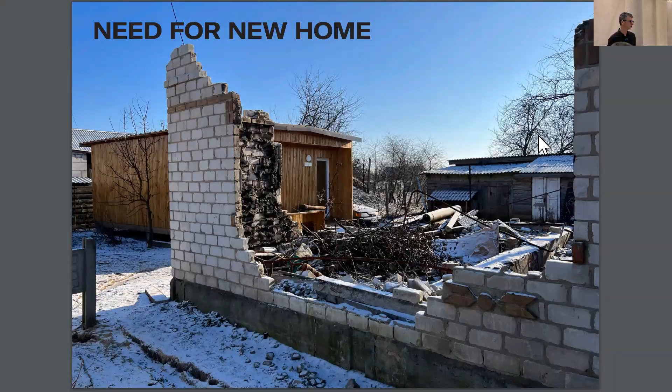When I joined the cluster, we realized that this was a really great initiative, a nice solution. But as a professional, there were some challenges to tackle. The first challenge was the one of upscaling, to speed up the process of the reconstruction.

The reconstruction and offering of new homes cannot be based on single units. There is also the question of future-proof design solutions, because we know that we are answering emergency needs now, but this emergency solution will have to stay over time, and it might become permanent or half permanent. So it has to be a very good solution because it needs to stay for a while.

And then we also have to ensure, besides the new dwelling, urban quality. From the moment that you upscale, there is also the question of how this will fit into the urban fabric, and how this will also create new hope and a new way of living together.

The idea through the cluster is that this is not something that is a single project, but rather an initiative that is open source. That means what we develop through the tools, but also material we produce, would be available for locals, for our colleagues, professionals, architects, but also constructors, to scale up and make our work available for others, so we can work together, and it's not just a single initiative.

So working on the upscaling and open source, we work in parallel on units, but also on tools, like a toolbox that would be available on the platform, on the website. This is a Rhino script based on a unit dimension, how you could assemble them to create multiple or multi-story housing for collective living.

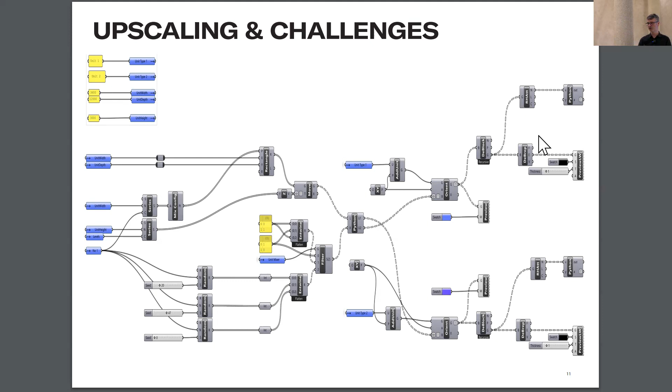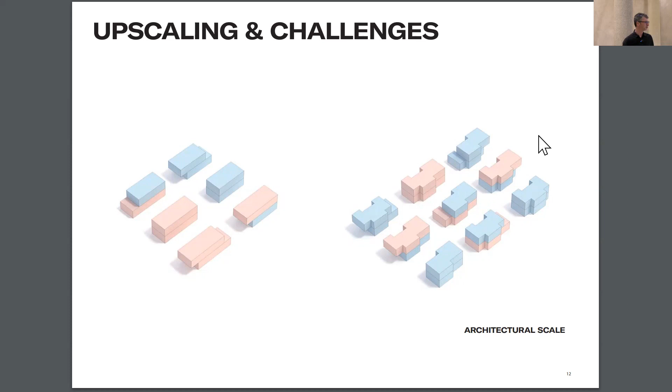And this is also working in an urban setting, somehow with parameters: amount of units, amount of floors, lengths, widths, also dimension of the plot, so that you could already generate some forms. So there are forms that can be single volumes, simple blocks, but also create some urban ensemble made of different sizes of blocks, of units.

That is also including some collective space or collective purpose. The one in yellow, for example, shows how you could integrate a school or daycare or even medical facility, shared space within the development, so that it's not only a housing solution. I think the work is trying to have a wide scope on what is needed with the reconstruction.

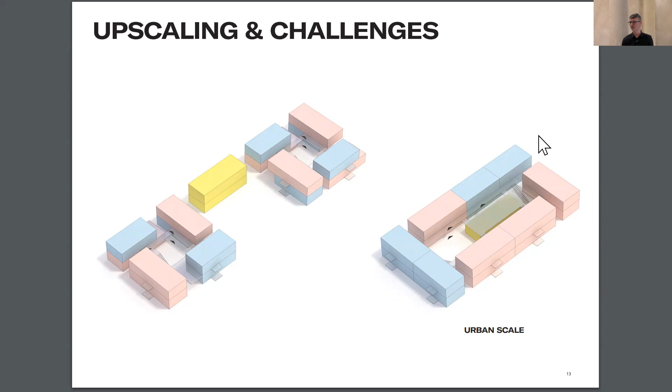To be able to do that, we worked together with FERA in Ukraine, and they have a factory in Dubno, in the west of Ukraine, where they already have a production hall. This is where they produce all the single units. Based on this production tool, we could dimension the size of our units and the elements. The idea is to work with prefab modular wooden elements.

And this modularity is very important for the success of the project, because on-site work will not be possible in the context of war and destruction. So we have to rely on a production that is far away from the front line, that can be a bit further.

The modules are manufactured in the factory, and then shipped on site and mounted with cranes, in a lightweight construction that requires limited support and construction equipment on site with a light crane.

The idea is that based on one module, we are able to offer the full spectrum of housing, meaning single, double, triple units. And this is allowed by the way we would assemble the module.

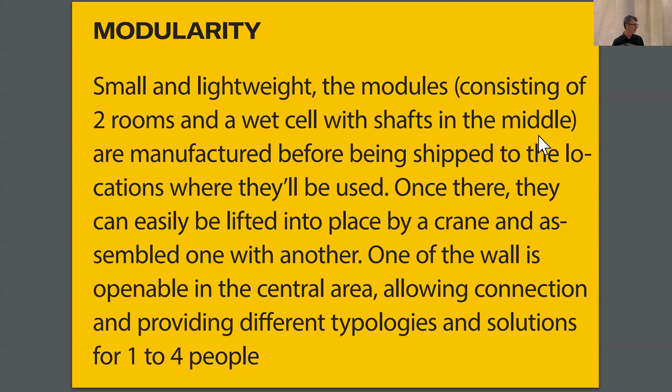For that, we have a test module. So we developed the base, which is a single unit. This is also what is presented in the plans. The single unit is actually made out of two elements that would be mounted on site.

The reason why we split it in two is the capacity of the crane in the factory, but also the capacity of the crane to carry the elements on site. So basically it's all made and meant with a very lightweight construction.

Once the two modules are assembled, each of the units has a living area with kitchen, a wet cell for bathroom and toilets, and behind it also has a sleeping room. And it's possible to open the wall in the middle here.

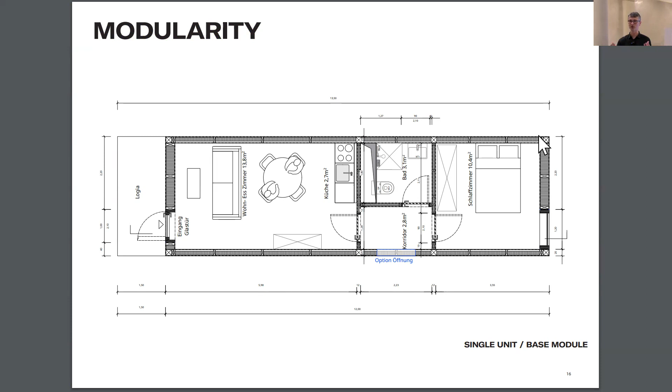Thanks to this opening that is preset in the module, it's possible to assemble and combine modules together and create bigger typologies. The bigger typologies, it's either the 2 room units.

That means you open the wall in between, and then you can have 2 bedrooms. This is for a family with, let's say, 2 children and 2 parents. They still have the same living space and a kitchen at the entrance.

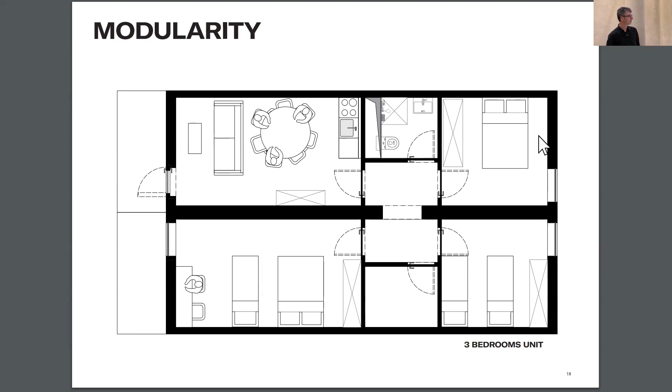And then you can even make a 3 bedroom unit, or like a collective living, like a WG. So this is with 1 more unit, and it creates a bigger room. So the modularity is a bit of, it's as much as we want, and then we can combine the modules the way we like.

And in a section, it's possible to stack them. At the moment, it's a challenge because in Ukraine, it's not allowed to make multi-story housing out of wood. So through this work we want to push that. We think wood is a good solution.

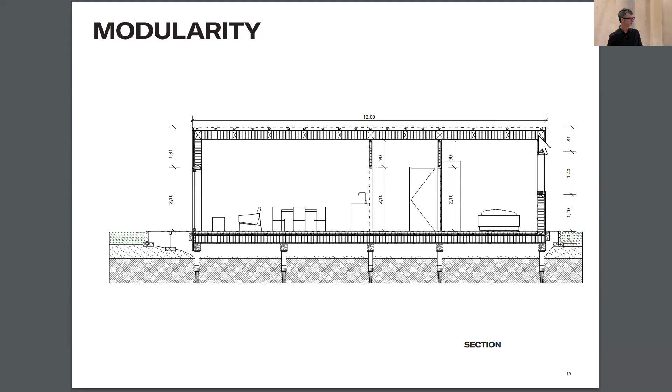So far we use the Swiss norms to plan the project or the proposal. This means that we work with external access, with a gallery system to access the module.

So what we want to initiate through this is thinking about the production tool, going from the single unit to the multi-story housing. It would go towards a pilot project to test all the challenges of this concept.

And together with the authorities, for instance the authorities of the City of Vinnytsia, we are looking for a site, for a location, for collective modular housing for internally displaced people.

This would be about 20 to 30 units. We think it's the right size for a first attempt. And that would mean that it would be a home for 40 to 50 people.

Besides the housing itself, we want to test the collective space, a shared space where people will gather. Also create a courtyard, a space outside where people will also meet and start to have a collective life.

And it's important for us through this pilot project to test all the technical limits of the single units that we have now. So that means the stacking. First to really test the stacking of the modules themselves in terms of engineering, but also in terms of regulation.

We know that through the process of the project, this would still be based on donation. We would be able to make it happen, but somehow that's a way to force the norms and the law to progress and move towards a multi-story housing building. So there is here on the screen an image of what this could become.

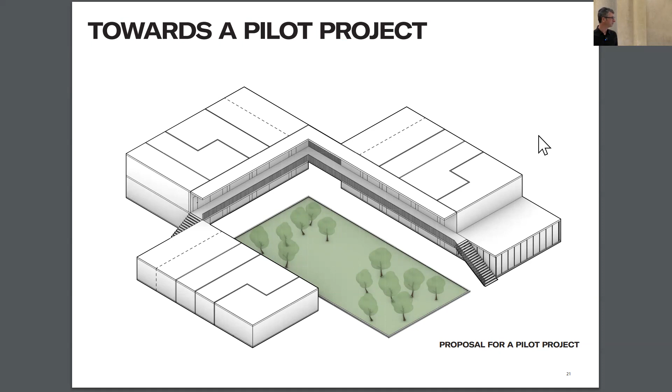While we worked in 3D, we also have a typical floor plan showing all those units. Again we can see how the elements are assembled with the double units, the L shape. This is very flexible, and this is where the script I was showing at the beginning will help us design.

Depending on the needs, depending on who needs a new home, through the parameters we will say we need that amount of single units, double, triple, and it will generate forms. Then it's for us to manipulate the cursor, the parameters, to find the right solution for the right plot, because it will have to match the plot given or offered by the authorities.

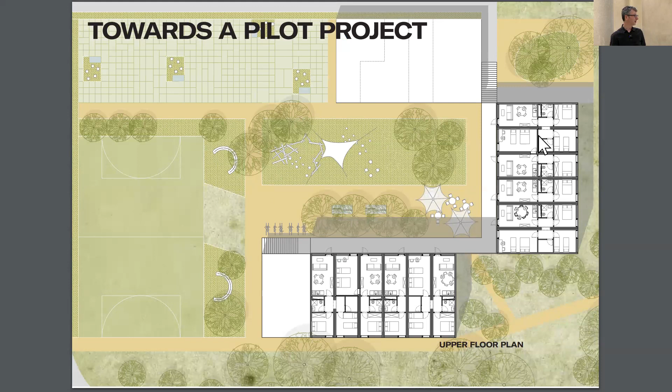This is the upper floor plan. We also have the other floor plans if needed.

I think it's also important to give images of the spirit of what we want to reach. This is an example of the office on collective living, with access from the outside gallery system, wooden construction, with a space to meet. Here we see the gallery is a bit distant from the facade to offer certain privacy.

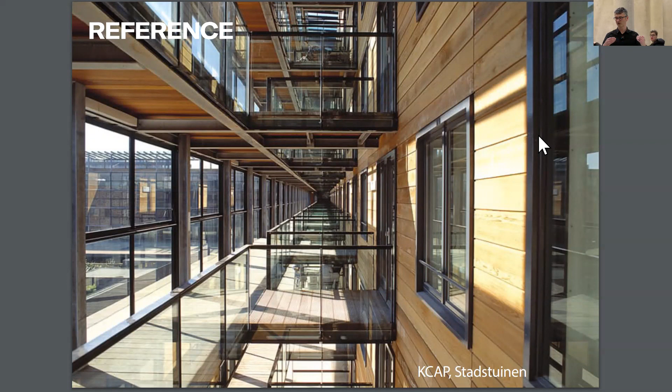In Ukraine there's also the question of climate. In winter it's really cold, so we need to protect from snow. That would be a gallery protected from the roof, but eventually also, or preferably, from the side, like a winter garden—to create this intermediate space. So this is a reference.

Our focus as an architect is also to look for a qualitative solution. Through the prototype, we test different types of facades, different finishes—not one definitive element that repeats all the time, but testing all the variations possible through the factory, since this is really a pilot project. It will be a bit mixed up, but this way we'll be able to test what works, what doesn't, and also test different aesthetics, because the solution needs to answer the emergency, but it also needs a certain beauty, because people need this too.

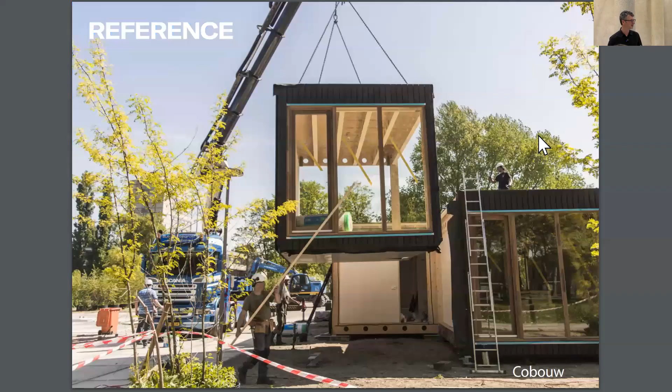I think it's important as an architect to design things that look good, where people will feel comfortable and won't feel in this kind of in-between situation—that they will really feel home.

This is another example realized by Dutch constructor Cobouw. Again, the idea of open source is, at the moment, within the Swiss network with Ukraine—we work with Swiss partners, with Divario, with Ferran Ukraine. But of course the work we do will be open to others, to other initiatives elsewhere in Europe. This is an example of other partners we could have.

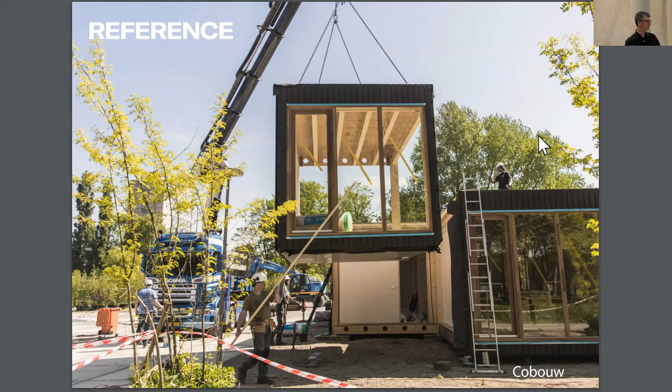It's a very similar constructive system to ours, in the modularity and the way you can combine and make typology evolve, from a single dwelling to a collective living in a vertical way, or a prefab wooden housing. So that's more of an inspiration.

I think the point today for us is to have more initiative together, to motivate people to get on board through the association Ferran Ukraine. Then they could build now up to 80 units.

So our next step would be to confirm the site in Ukraine, and then start a crowdfunding or funding in general to be able to have this prototype and prove that it's possible to go a step further into the upscaling of collective housing, multi-story, and also test the different construction systems and quality that can be used as an example panel for other architects in Ukraine and abroad, with different constructive systems.

So I thank you for your attention. I'm at the end of the presentation, and we now have time for questions.

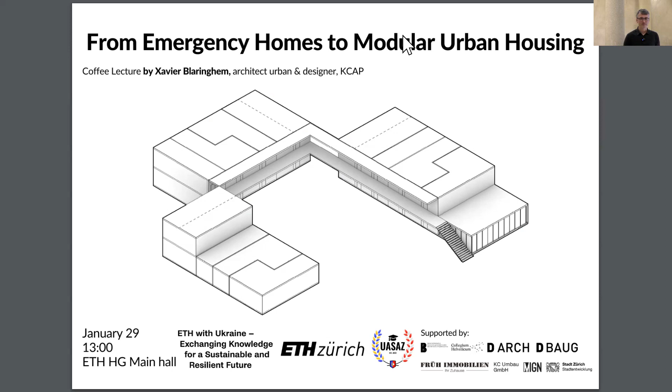And how much does this one unit last? For how many years can people live there without it being reconstructed? My estimation is that it can last for at least 25 years. This is part of the idea. The reference I had in Switzerland was meant for a site there for 10 years, then it can be unmounted and remounted somewhere else. But let's say the lifespan of the module is about 25 to 30 years maximum. Through the modular system, it would be possible to unmount and remount somewhere else if needed.

Hi Xavier, I have a couple of questions. So extendability and height, how many levels can be stacked? And I was wondering about the customizability of the unit, so can people choose color, how would that work so it's more personalized?

Just brainstorming, for the amount of levels we estimated we could go up to 3 to 4, not too high because of the modular system. Then comes the question of the lift. At the moment, through the prototype, we'd like to test only 2 levels and not have a lift for the second floor. But it's more of a technical question of how high we could go, though easily 3 floors, maybe 4. For customization, at the moment it's more meant for the inside.

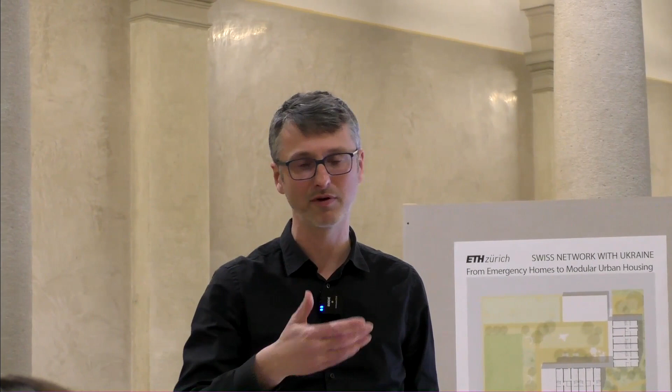The inside is rather raw, and everyone is free to do the interior themselves. For the outside, I think that would be rather us, through prototyping and testing different types of facades, a variation of volume and different facade elements, blinds, shutters, rhythm, or a type of elevation, but all made out of wood. We could also test different cladding, but the idea is to use as much as possible the tool that is available. What will be a bit more difficult is the proportion of glass and windows, which probably need to be a bit more standardized.

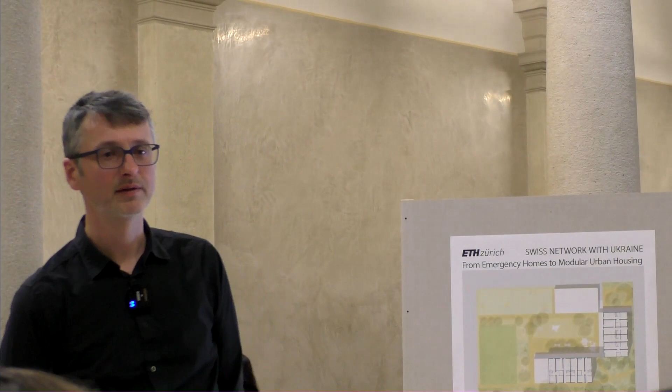Thank you, I was committed a bit later so I didn't know all the details you produced to the public, but I understand the topic. My question is how much it could cost, for example, for the big half of Ukrainians who were affected, that's on the south and east side, from villages. The people didn't and don't have big salaries before, and also now because of the inflation and so on, how would they afford housing?

What was presented today at the beginning of the presentation, and also in the panels, is that the model is donation-based. So it's crowdfunding, financed by people who give money, and then it's a donation to people, so they actually don't need to purchase their new home. The idea would be to continue the same way as far as we can carry it. That's the financing model so far. Does it answer your question?

Yeah, and in addition, if the people who donate and finance the housing, who would be committed to oversee the financial distribution? Who would be in charge of that?